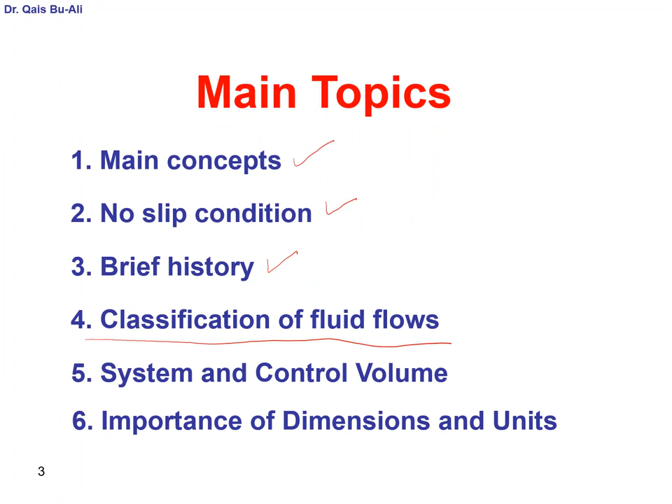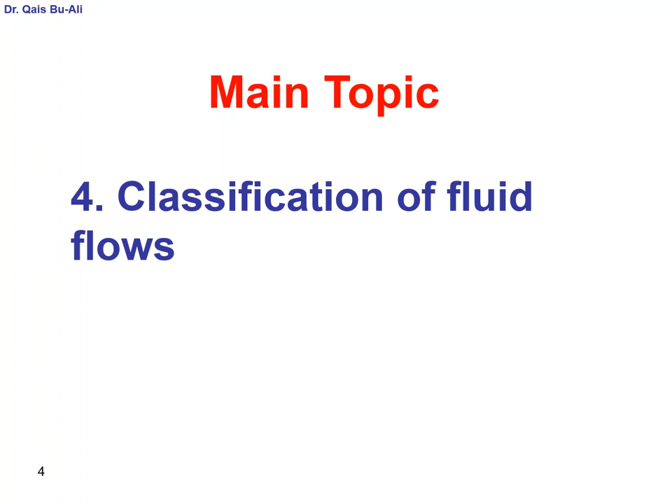So this will be the main subject of this short lecture, which is classification of fluid flows. Main topic is classification of fluid flows. So I want to classify different types of flows. So the way I'm going to do this, I'm going to talk about three short movies, and then I will keep the others for you. So we can classify fluid flows by different methods, different classifications.

So we can classify them as viscous versus inviscid. So viscous means viscosity is important. The effect of viscosity is important in the flow. Inviscid means the viscosity is not important.

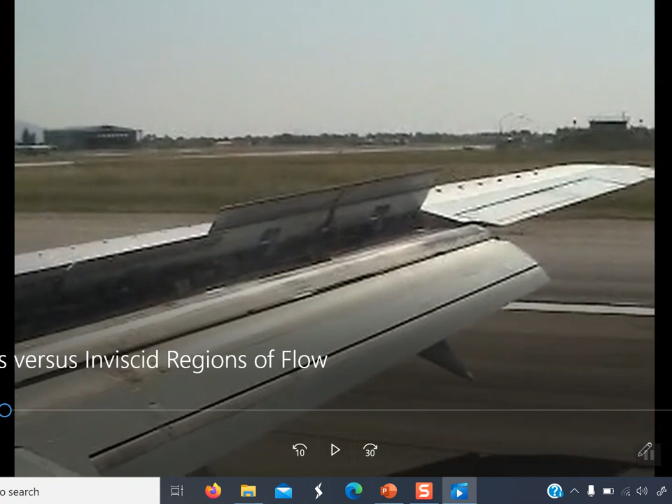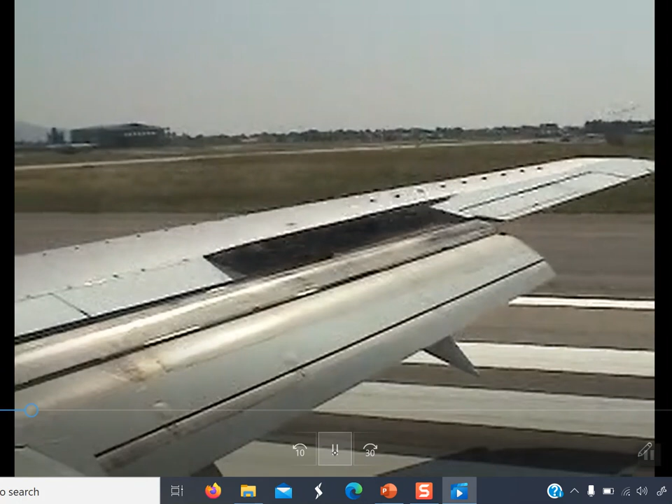So let's start the first movie. The first classification is viscous versus inviscid. So now we will concentrate on the flow over a wing of an airplane.

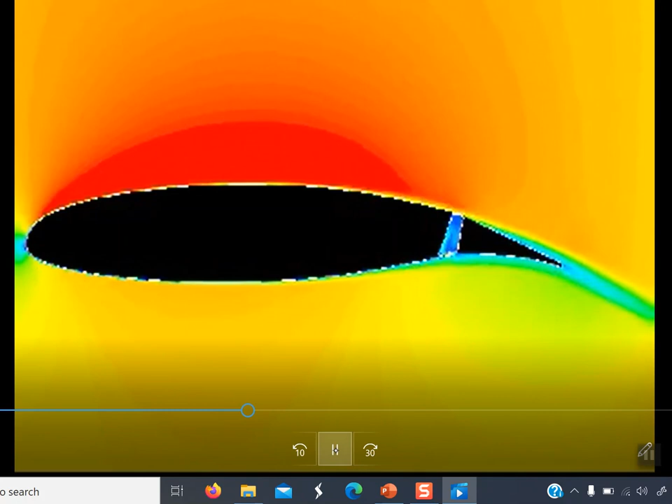So what you see here, those colors, the red color and the orange color, show the distribution of the wind speed. So whenever it is a higher speed, it is red in color. Whenever it is lower speed, it is orange or yellow. And we have here at the rear, at the back of the wing, the flap, and the flap is oscillating. And this animation is created by a computer package. It is called CFD, Computational Fluid Dynamics.

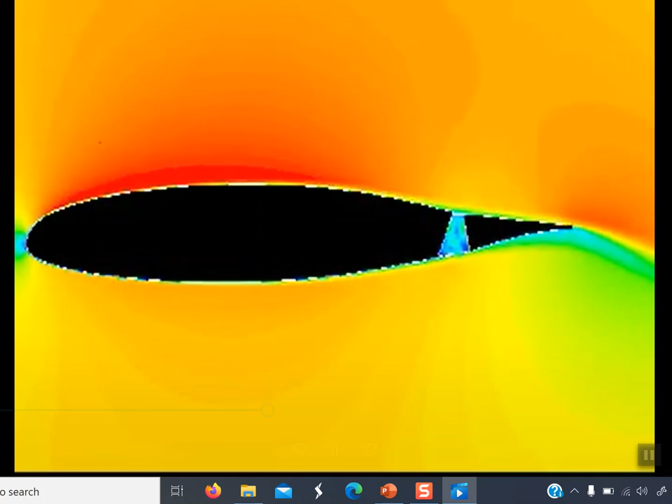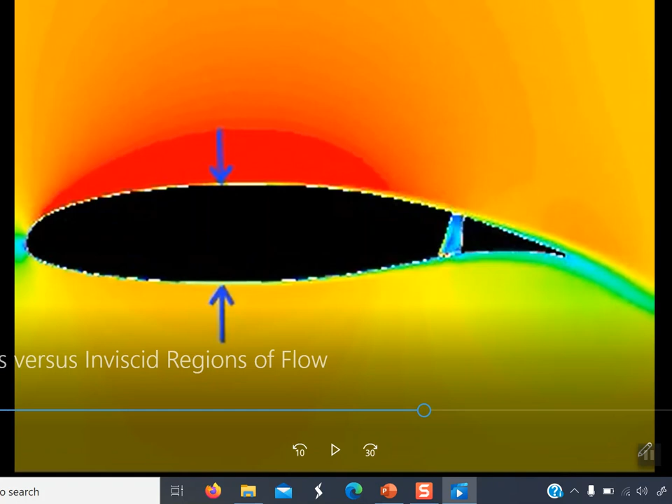So here, very very close to the wing surface, we have a very thin layer. It is called the boundary layer. So in the boundary layer, viscous forces, the forces that are caused by viscosity, are important. They cannot be ignored in this very thin boundary layer.

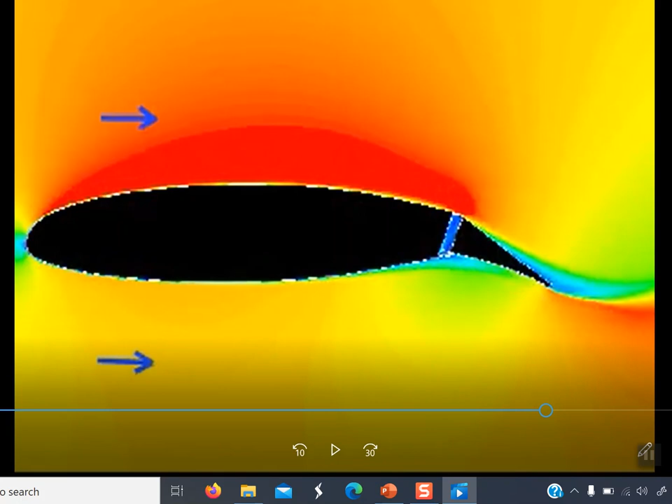However, if we go away, as you can see those blue arrows, when you are away from the wing, from the boundary layer, viscous forces are not important. However, the inertial forces are important. Inertial forces are the forces, let us say, governed by the velocity.

So this is the outer inviscid flow region, the region outside the boundary layer. This distinction was, let us say, a great contribution by this scientist. So this is the first movie or video clip, which is the distinction between viscous and inviscid.

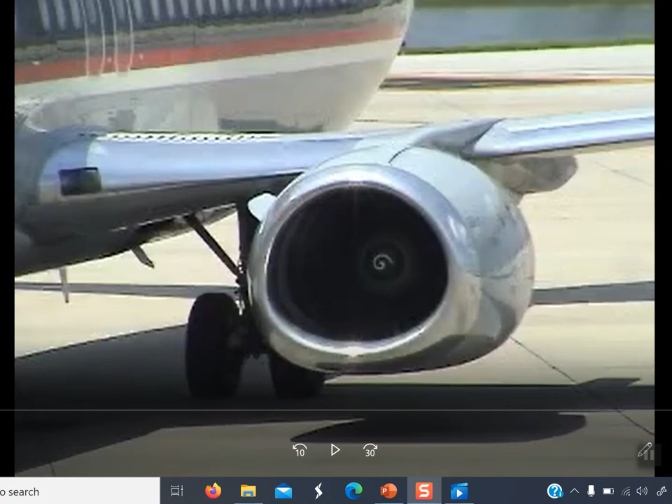Now, this is the second distinction, which is we classify the flows as compressible versus incompressible.

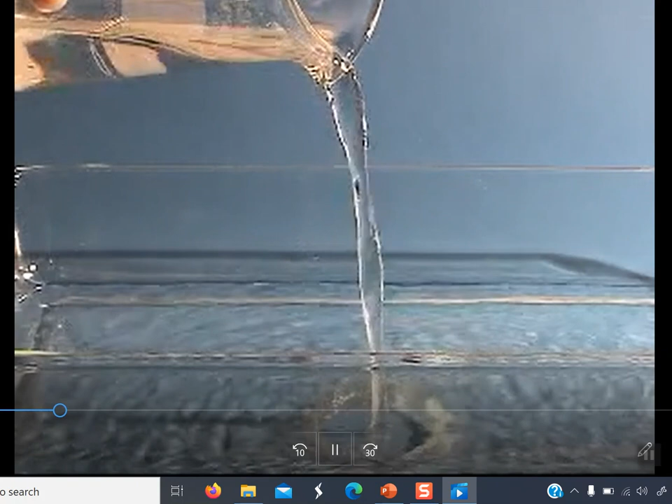Most liquid flows are incompressible. So most liquid flows are incompressible. Liquids are considered incompressible. غير قابلين للضغط. They'll keep the flow density constant when we solve the equations of motion. And if they are incompressible, then we keep the density constant when we are dealing with them in the equations.

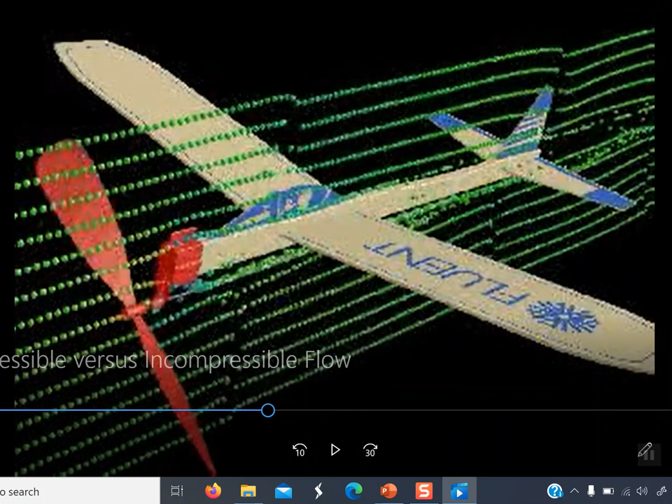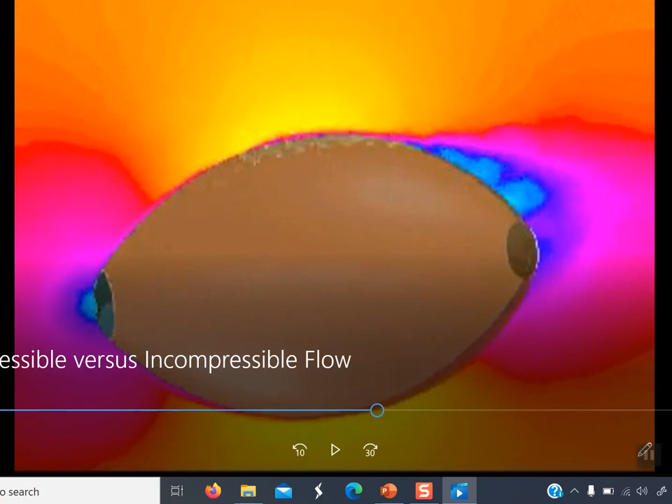Also, to make our life simpler, gases, which are compressible, but at speeds much less than the speed of sound, we will also deal with them as incompressible fluids. So this is an example, which is airflow around a toy airplane, or around a spinning football. طبعا this is an American football, which is different than the football we are using.

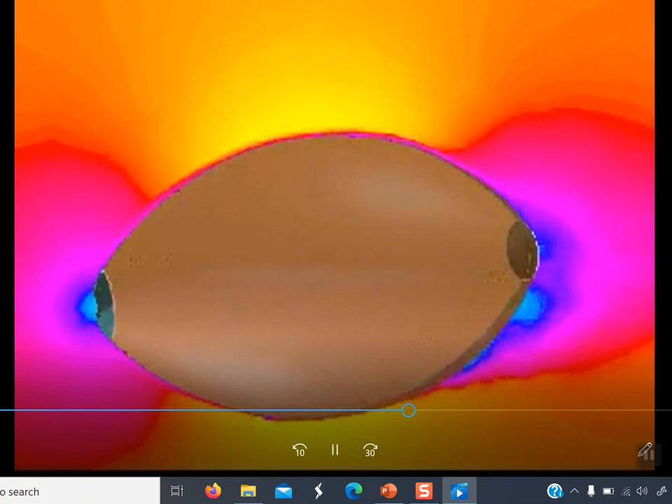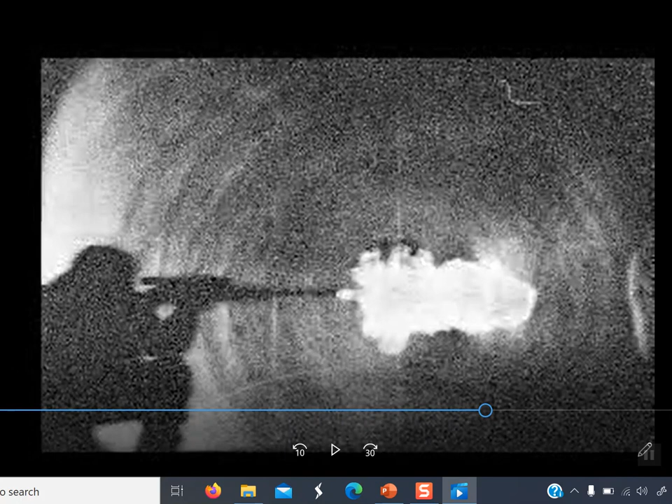On the other hand, if we are dealing with gases that are moving at high speeds, then they are very compressible. So you have seen the movie, and now you are seeing the simulation. And this bullet is emerging from the muzzle of the gun. قاعد تطلع من ماسورة البندقية. Okay?

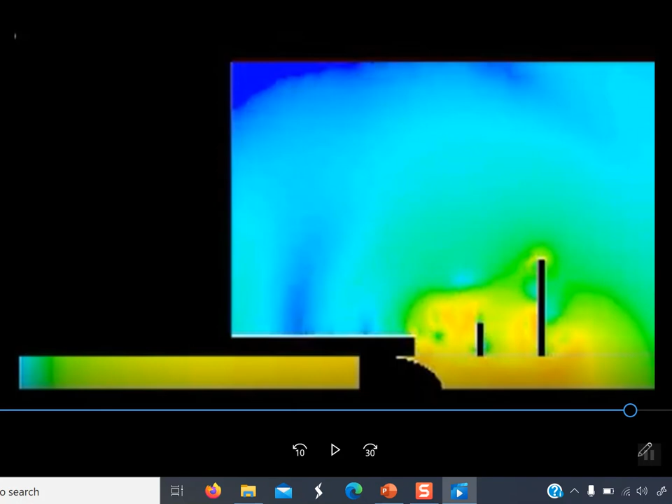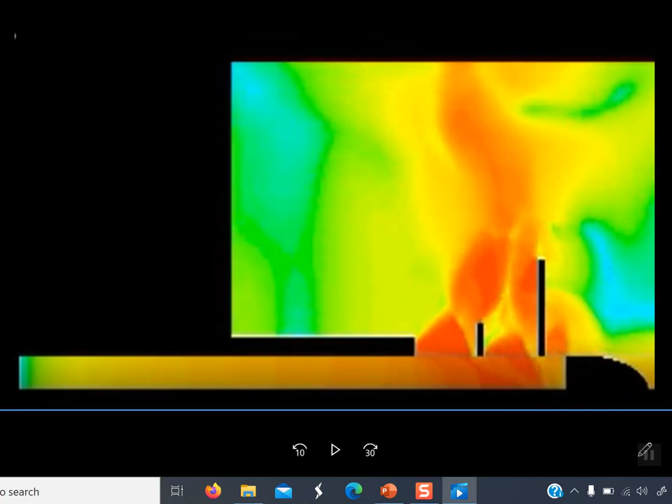And what we have here, this red thing, is a shock wave. Whenever we have an object that is moving faster than the speed of sound, they will have shock waves, and those shock waves were, let us say, created because of the high speed compression of the gas, which didn't happen, for example, in the other two examples, in the spinning football and in the toy plane.

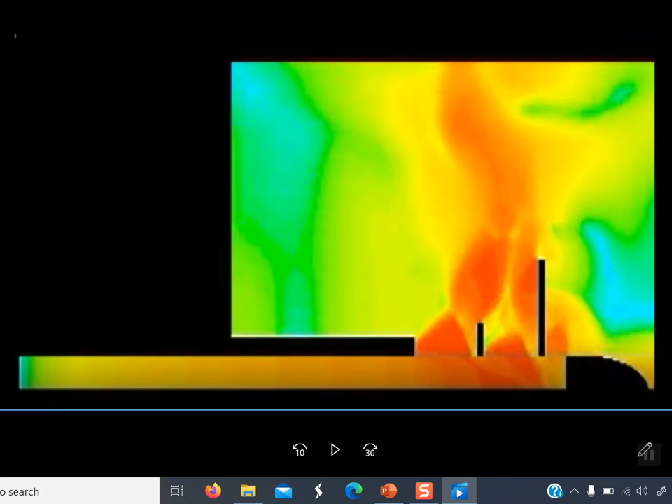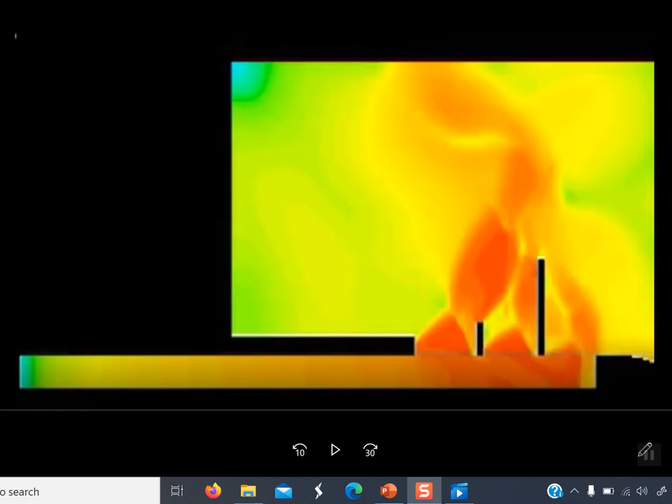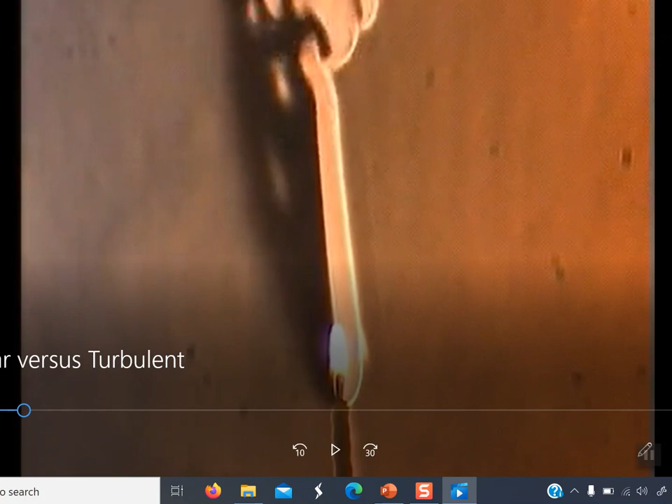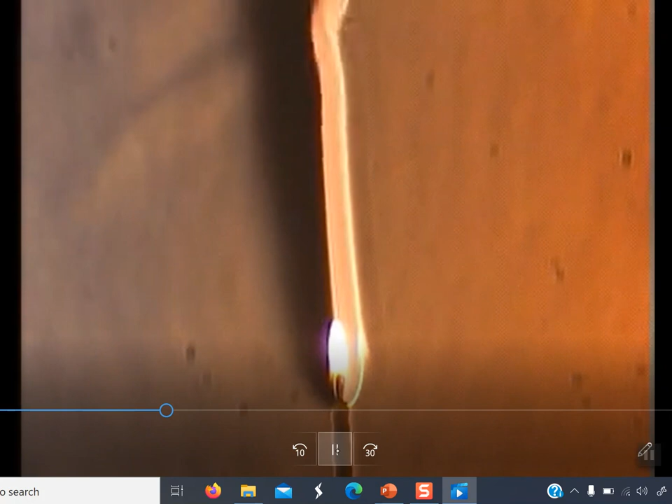Now, this is the third classification. Let us talk about it. Another way to classify flows. So this is the third way to classify the flow, as laminar versus turbulent. Laminar flows. So laminar means the flow طبقي, flow in layers, less mixing. As you can see it here at the beginning of the flame. Okay, here, this region. So we have the flow smooth and ordered in layers. It is called laminar flow.

So on the other hand, we have the turbulent flow. Turbulent flow is when you have, for example, a lot of mixing here, and when the inertial forces dominate viscous forces. لما تكون القوة اللي ناتجة من الحركة is مسيطرة dominating viscous forces القوة اللي جاية من الفيسكوسيتي من اللزوجة. And it happens at a higher location of the candle.

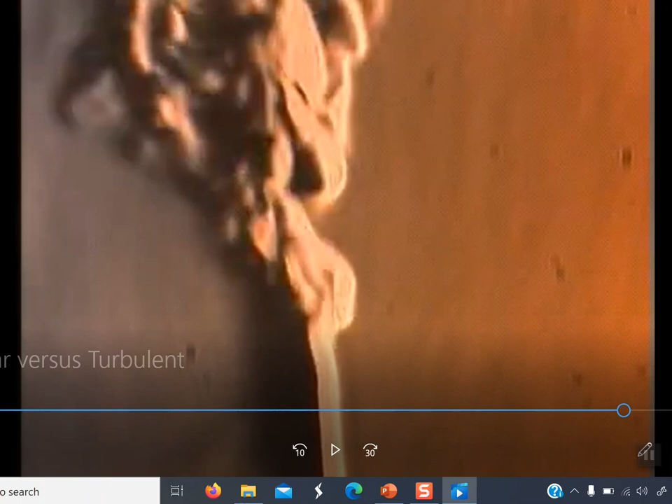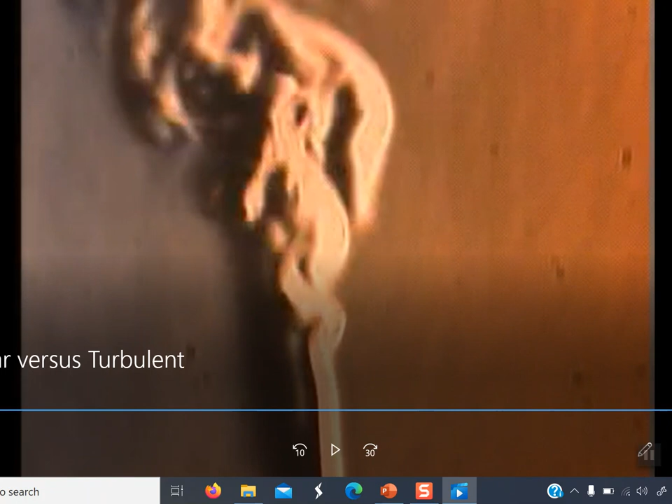So as he said, turbulence will cause those eddies and swirls دوامات والفوضى اللي تشوفونها هذه فوق. So those eddies الدوامات هذه will cause mixing in turbulent flow which wasn't there in the laminar flow. And usually dealing with turbulent flow is much more complicated because of the high mixing.

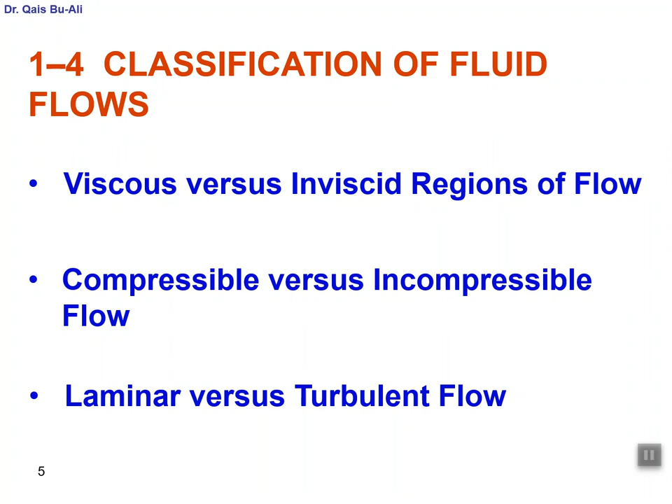So now I come back to my slides. So as I've just told you, I talked about viscous versus inviscid, compressible versus incompressible, laminar versus turbulent, and I will keep the rest, okay, which are natural versus forced, steady versus unsteady, and internal versus external. Those are easy also. Please watch them and comprehend them.

So this ends this section of the book. Actually, since this section will be discussed later in the course, for this section you don't have to read it from the book. I will be satisfied if you watch the movies and comprehend them.